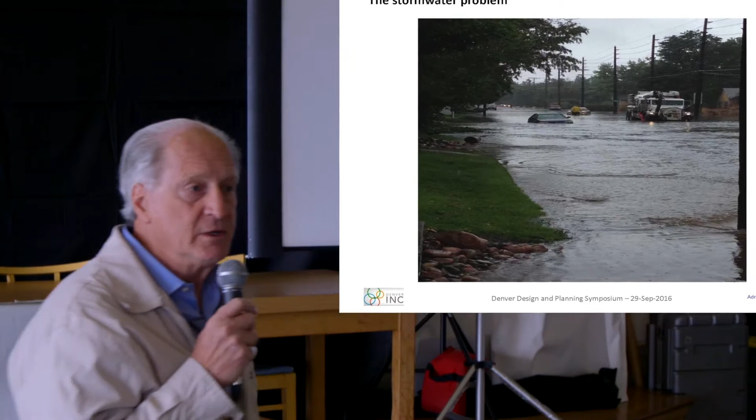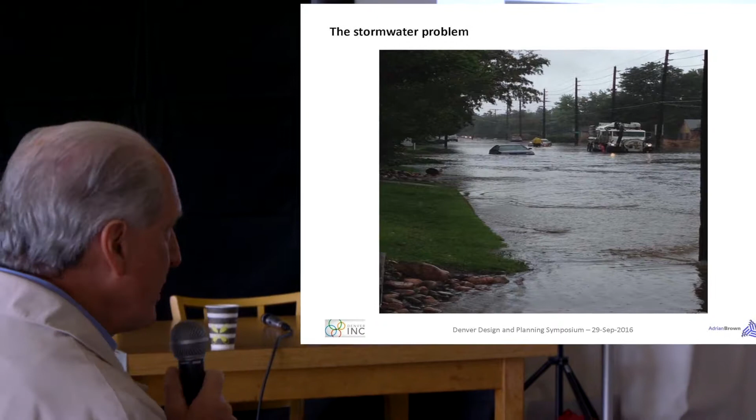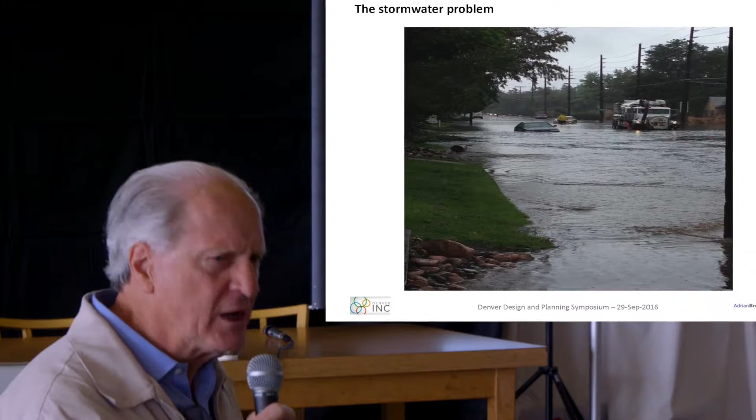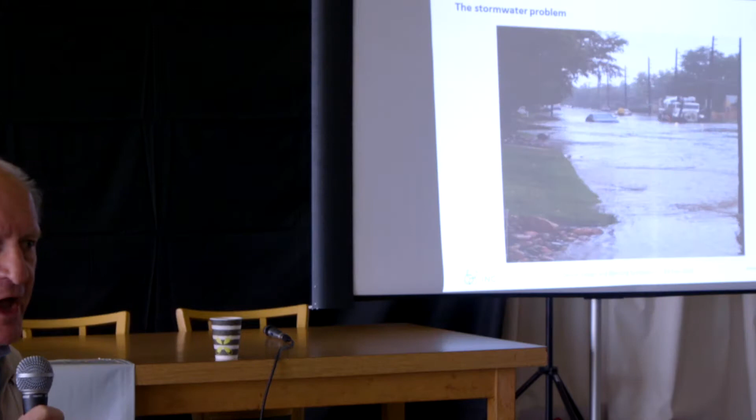I've become embroiled in the last year and a half, 2 years, looking at stormwater, brought about by Denver's insistence on spending $300 million of your tax money, or actually fee money, to revamp a part of our stormwater system. It got me to wondering what we are doing with stormwater protection and why. What we are doing in the first place is trying to prevent floods occurring in Denver as frequently as once a year - this is one about 3 years ago - and as infrequently as once a century. And what we are doing to achieve this is treating stormwater that comes out of the sky as a waste product, and we are attempting to get rid of it as quickly as we possibly can, so that we can go out and get another latte instead of waiting the half hour, the 2 hours, the 3 hours, or even a whole day once a century to get that latte. And we're paying a bunch of money to do it.

Even more ridiculous to me, as a water engineer over all of my life, is that we are in a semi-desert. Here the good Lord sends us a huge dollop of water, and all we can do is say, God, how do we get rid of this quickly? And where do we go to pay a bunch of money to put it together quickly? In my mind, that is absolutely asinine planning. I'm looking at the end of this discussion to have every person in this room get active in stopping this insanity, getting the simple solutions that I'm going to present to you, which every person in this room, with the possible exception of me because I've got 2 artificial hips, can implement themselves. On with my story.

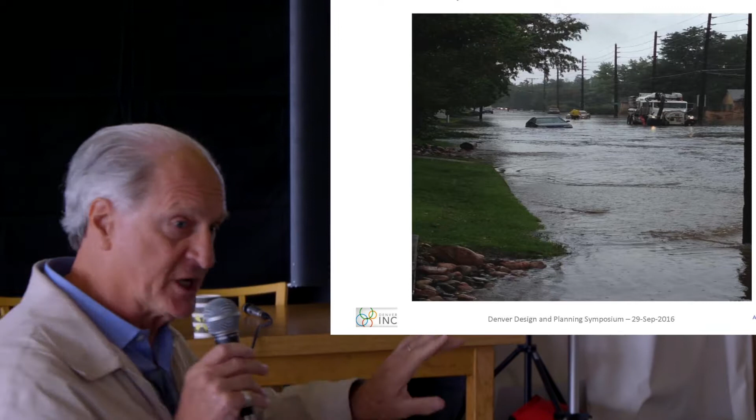You'll notice on this picture, important to my presentation, what has flooded? The road. What gets people really mad in Denver when something floods? Their basement? No, you hardly hear anything about that. It's when they can't get in their car to go get that latte that they get angry. That's what we're spending $300 million fixing. We need to stop this. Over here is a vac truck, out there trying to unplug the drains, which have plugged up, and which this poor guy doesn't seem to be able to realise are there. The bottom line is this picture, famously put in the newspapers and shown as utterly unacceptable, shows the true insanity of all of this.

Getting rid of this floodwater when it occurs is a major engineering challenge - nobody be unclear about that. Under the whole of Denver, there are all kinds of water management systems designed to deal, up till recently, with a 1 in 5 year storm, and now, in parts of Denver, a 1 in 100 year storm. These are massive engineering undertakings, very expensive and difficult to keep running.

So what happens? Well, let me just quickly go back to this. This water here came from someplace else as a result of a storm. Look what is happening locally as a result of that same storm, which it presumably got. Looks pretty damp to me - nothing, it's not flooded here. This guy could go out and play golf, chip balls around and so forth, in the rain doing this. This is something that somebody else gave him - somebody else being mostly the people who live higher in the basin, which in Denver typically means the nicer areas. So by allowing stormwater, we create a social problem.

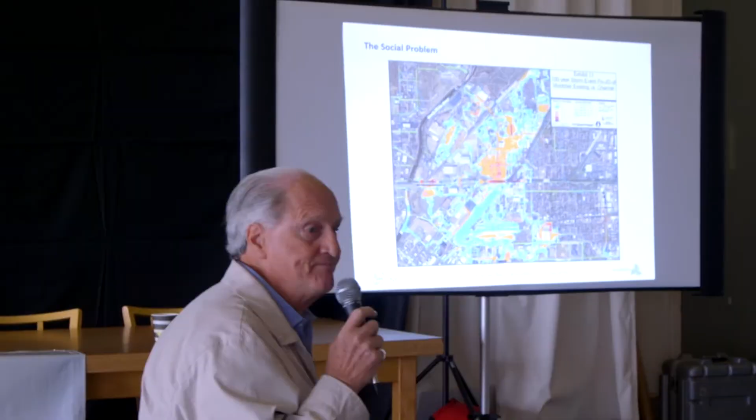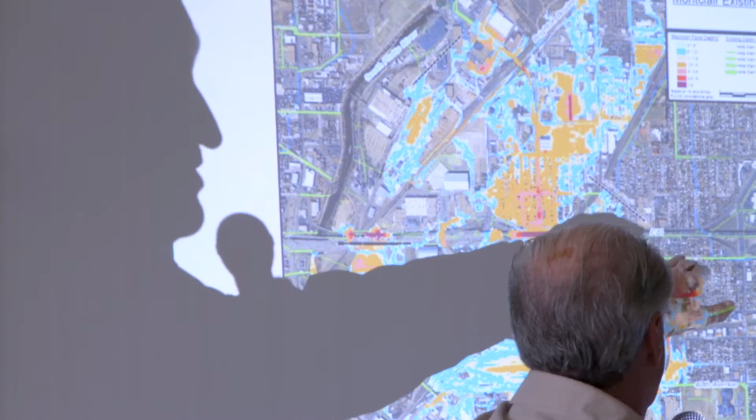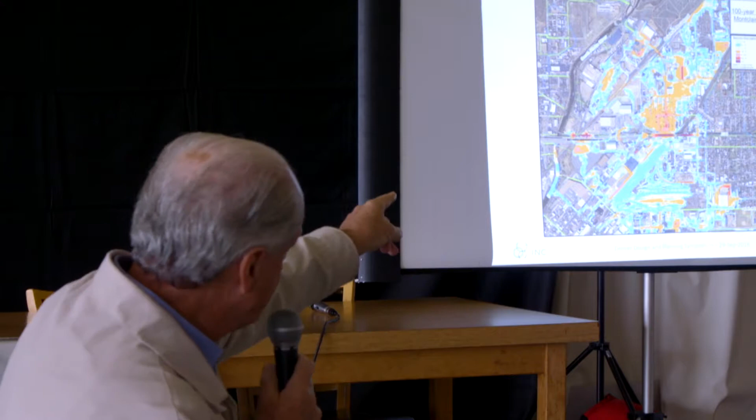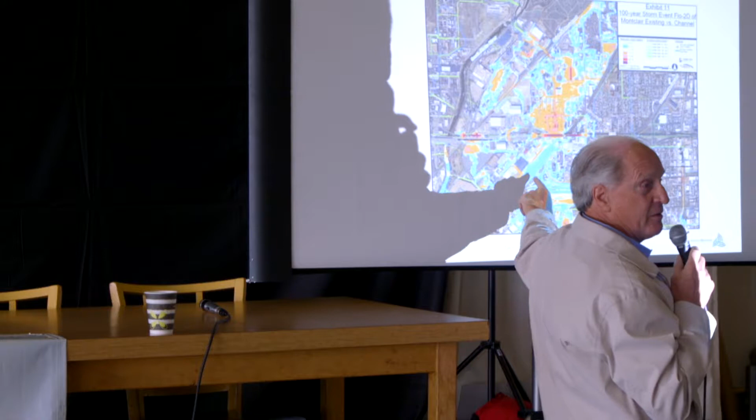This is a picture from a storm event, a modelled storm event, of the low-lying areas of Denver. Down here is I-70, here's Globeville, here's Elyria Swansea - the industrial and relatively affordable housing areas of Denver are all down there. But we don't care too much about them. Even the $300 million program we're instituting right now won't protect these people. It doesn't affect anything about Globeville at all, except possibly that it puts a bunch of water into the Platte River, thereby exacerbating any flooding on the other side of the river in Globeville. The reason for that is fairly complicated - I'm not going to go into it, but trust me, it's true.

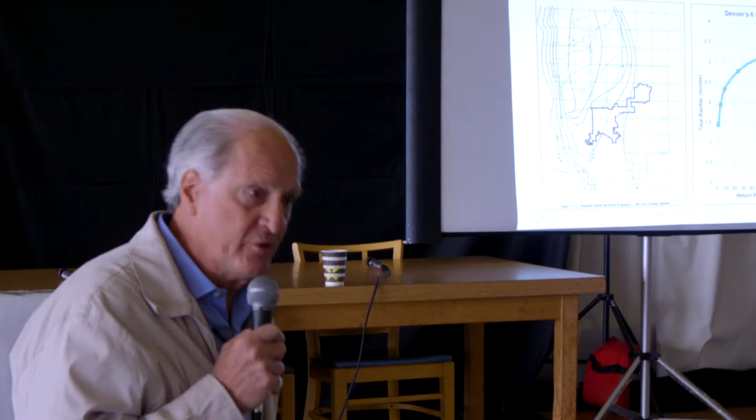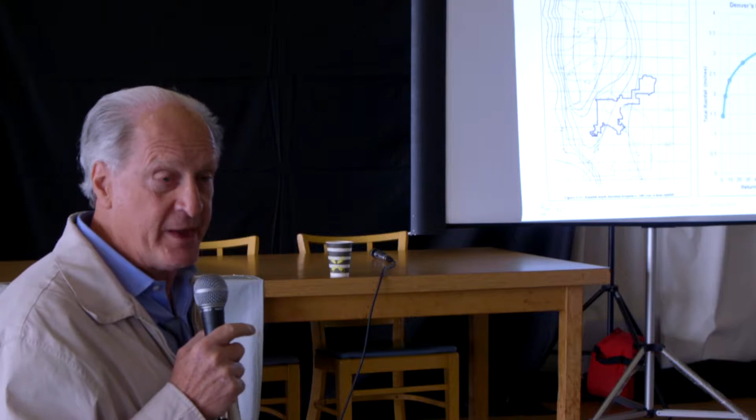So what are we talking about here? You've heard, no doubt, about the recent flooding in Houston and on the East Coast. They were getting in the order of 15 to 30 inches of rain, this deep, coming out of the sky on every square foot of the whole area. And when that happens, you've got a problem, and a really serious problem.

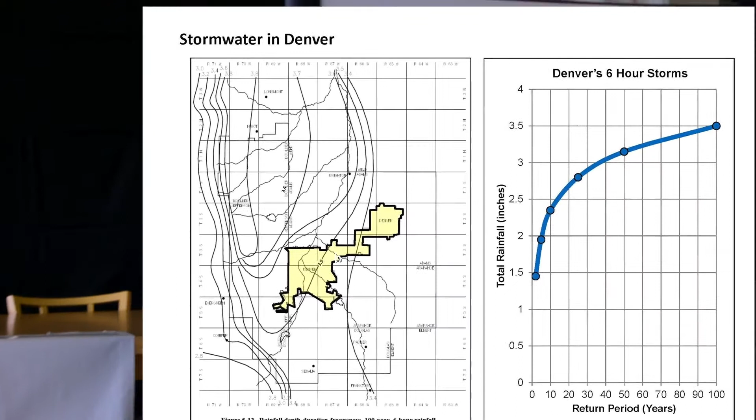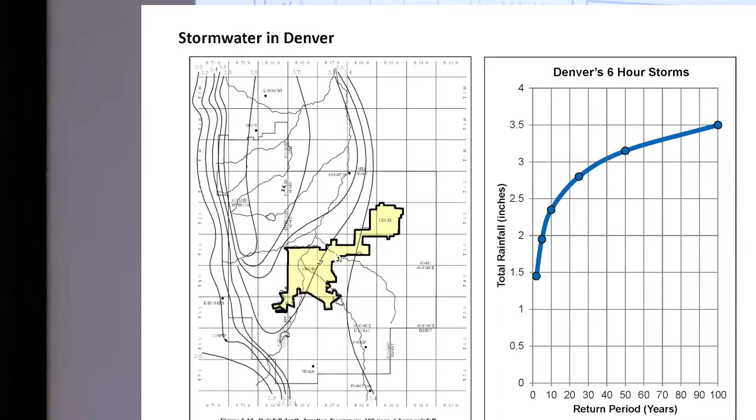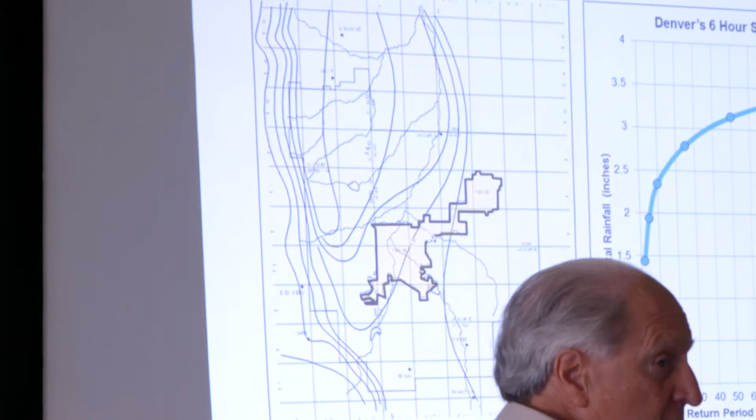We don't. This is the design document that Denver uses for its stormwater that shows the rainfall depth for a 100-year, 6-hour storm. They use other things, but I'm just going to deal with this one because it's illustrative. If you look at this, this is for 6 hours. Right through here is the 3.5-inch rainfall. So a 100-year storm in Denver gives you this much water.

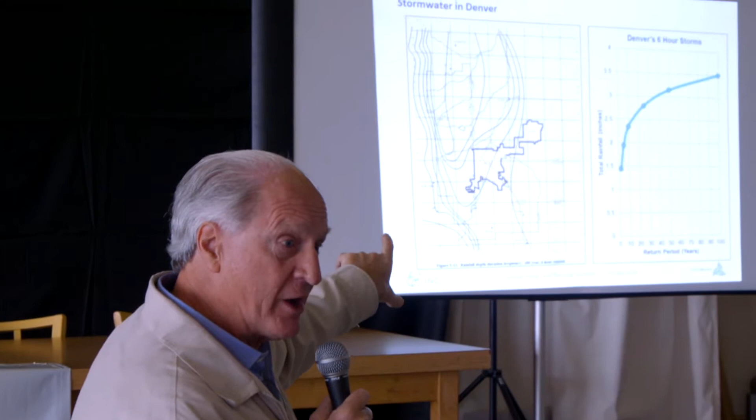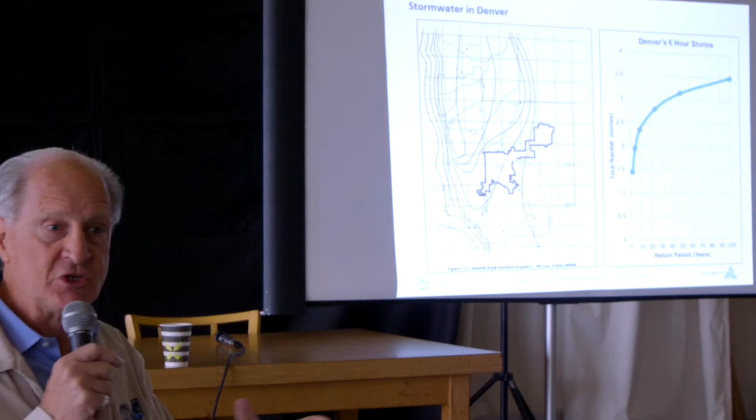That's why, when it happens, that guy can go out into his front yard and chip balls around, because it ain't there very long, and it isn't very deep even when it is. Take that water, however, aggregate it over 200,000 houses in Denver, and let it go down the road, and guess what? You're confronting what the guy in the floating car was confronting, a massive downstream problem.

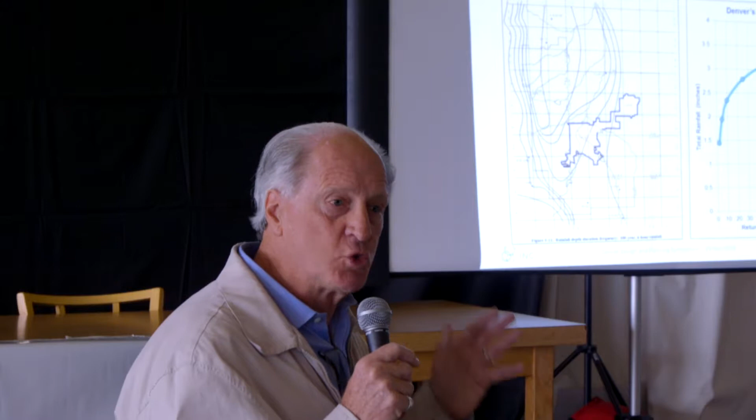So, as with most problems, the solution to this problem that's sensible is a source solution. The problems we have right now are from the aggregation of all of the runoff going down into a very limited set of conduits. Where does it come from?

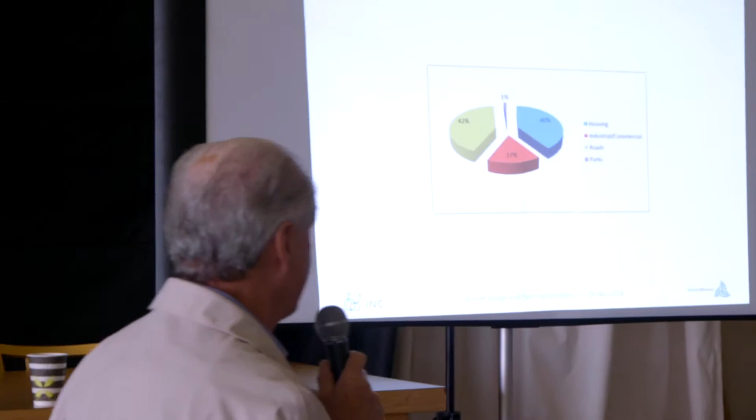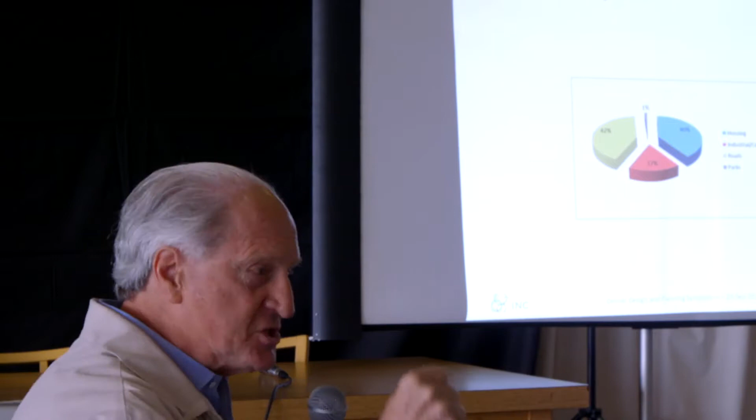Well, this is a little pie chart. Stormwater flooding sources. To, I think, everybody's great surprise, 40% of the water that winds up running off, more or less instantaneously from our urban environment, comes from housing. And what do we do with that as homeowners? We have downspouts, and we, by God, like the city, rush to get that water off of our property, because it's a waste, and into the street.

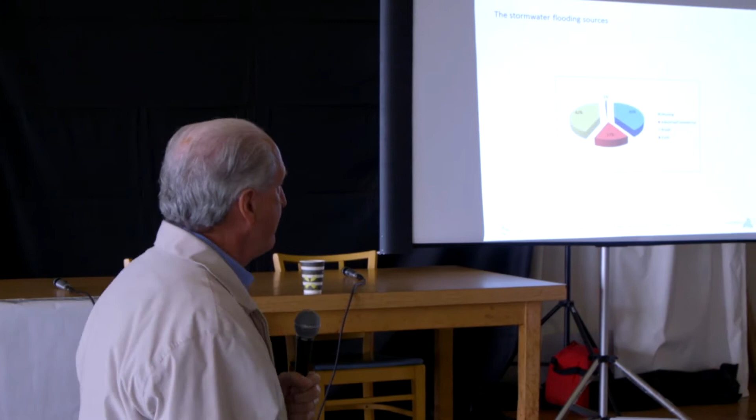Everybody does that, pretty much, except me. The next big hit is from roads. Big surprise for people. A lot of people think, oh, the big problems with flooding and stormwater are industrial. Well, they're not. Well, they're significant, but they're not huge. 17%. So we're 40%, industry 17%, and roads that we insist on driving these gas-guzzling cars around on are actually the biggest villain of runoff.

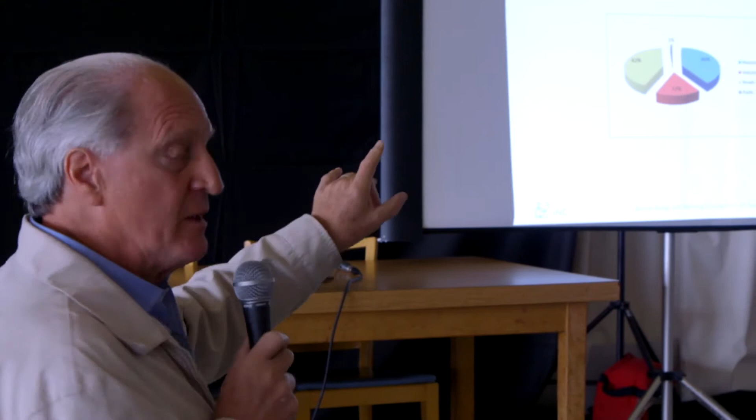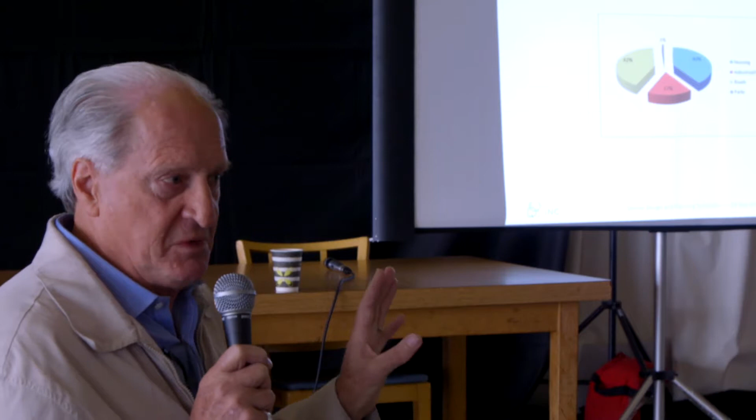So we need to address all of those things. The 17% from industry kind of has been addressed a bit with the Green Roof initiative, which our city not only declined to support, but actively opposed. But the citizens very smartly decided that it was probably a good idea, possibly because they thought that industry would pay for it. But, you know, for whatever reason, it was successful. And it has been successful, and it does create a significant stormwater benefit, among other benefits.

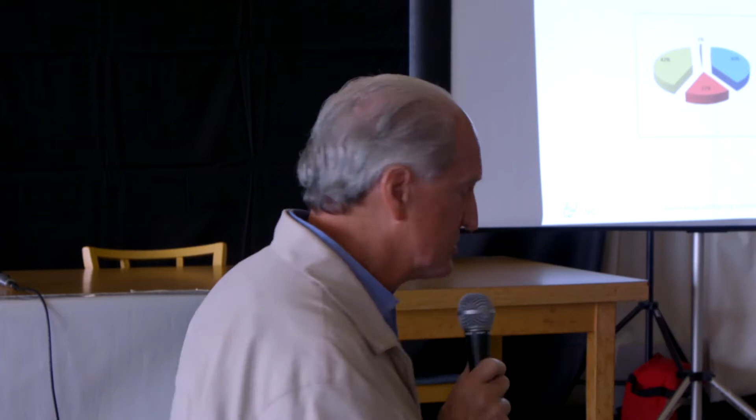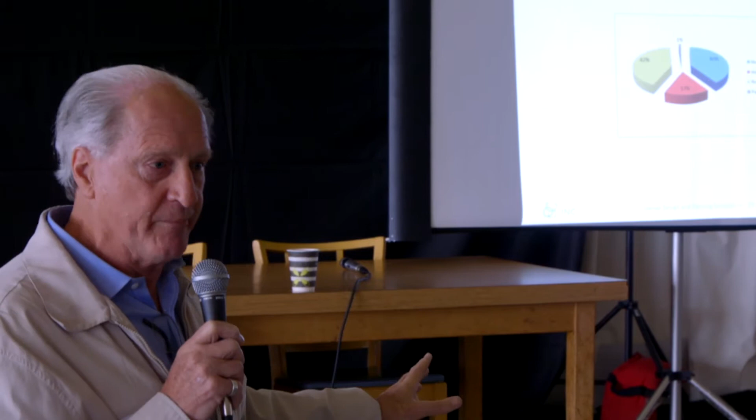So, you know, I just put in here because I know the parks people are here. Parks are 1%. The reason that's important is that is the area that we are currently using to solve our stormwater problem. So we've got 1% of the stormwater coming off the parks and 1% of the area, and we're going to use that 1% of the area to stop people playing golf and start storing our stormwater.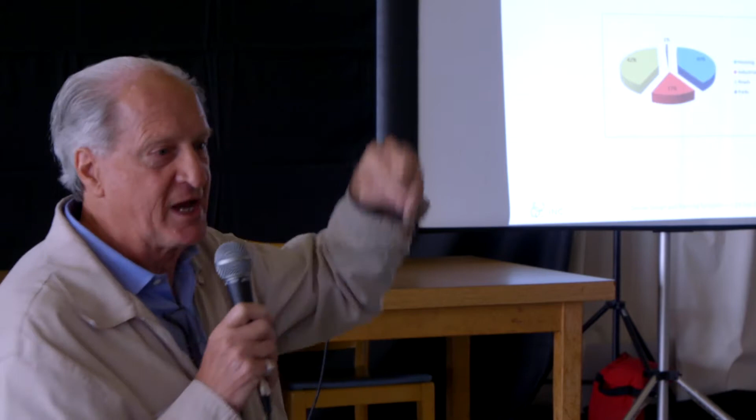I'm not going to be finished in 5, because this is too important, I would believe.

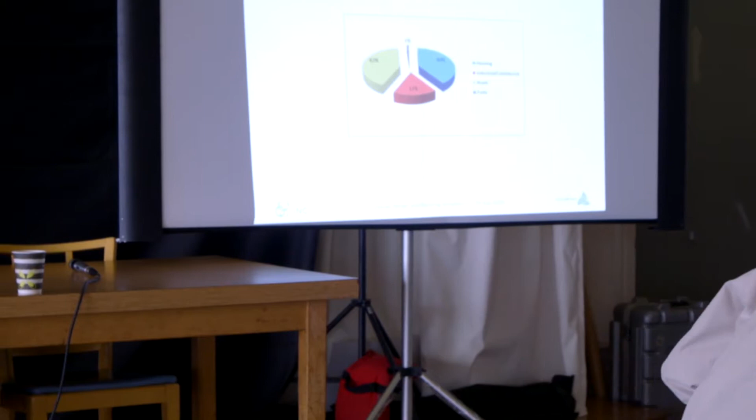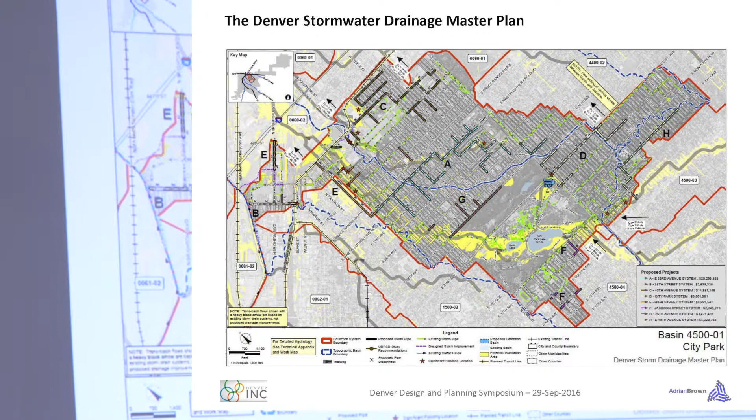So what's our current system? Our current system, this is an example out of the Denver Storm Drainage Master Plan. It's a 40, 50, 60-page thing with huge plates like this showing all of the plumbing we've got to deal with this one problem. And this happens to be the one that's centered around the golf course that got dug up. I'm not going to go into that more than to say it's complicated, it's meant to be complicated, it's bloody hard to do.

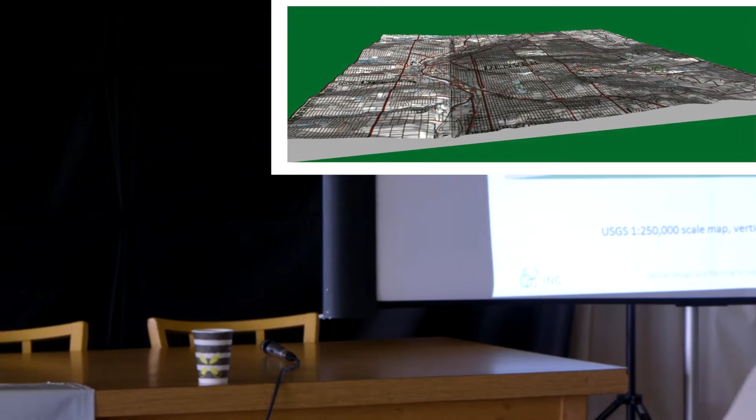But what are our opportunities here? And they can be encapsulated by looking around. Unless you look in this direction, Denver's pretty flat, the Queen City of the Plains. This is an example, and you can see just how flat. This is a 10-to-1 vertical exaggeration. Look at the edge here. Bit of a slope on the west side, we're over here someplace. Even less of a slope over there. It's flat, folks. And from a stormwater point of view, that's both a good thing and a bad thing.

It's a bad thing because when rain lands, if you want to get rid of it, you've got very shallow gradients. So the pipes don't work very well. And you don't get much runoff. So what happens? You get buildup of water. People don't like that. The good thing, however, is that if you don't want to get rid of the water, but want to keep it someplace, it's flat. So it just tends to stay there. And if you put little dams in, you can help it do that.

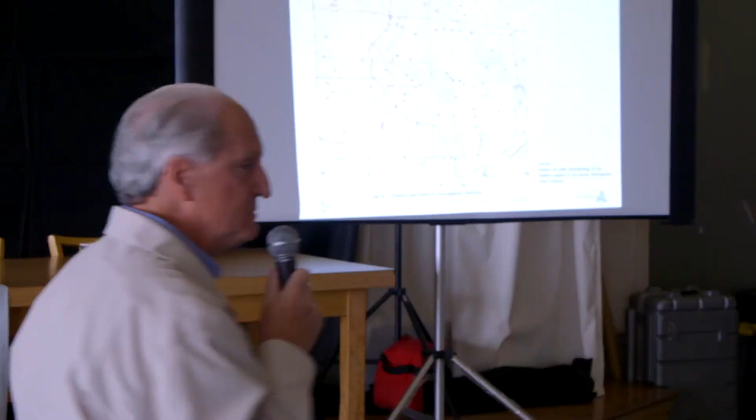Second important thing, Denver's permeable, but basically covered with sand. Not everywhere, but it's permeable, so that any water that lands, you don't even have to store it for that long to get rid of the 1 hour, 2 hour peak in the storm thing.

You can let it sink in, and that has other benefits I'll get to later. Third benefit, the water table is quite deep around Denver. The water level underneath most of Denver is at least 20 feet below ground surface. Why? Because we paved over Denver. It used to be at the ground surface, but it's not anymore. We paved it over, prevented infiltration. Next thing you know, the water table drops. This groundwater is being used by Adams County, South Adams County, as its only water source, and so they're drawing this water down as well because they need to, and they have a right to.

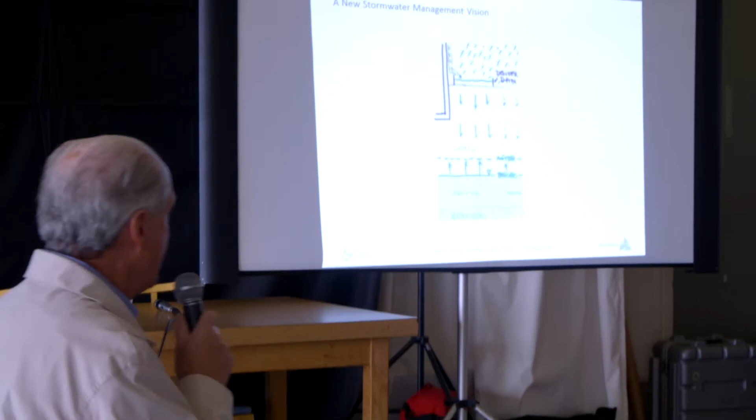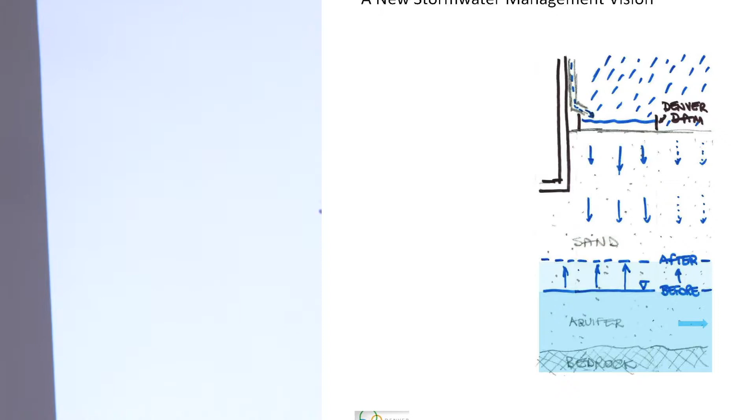So what's my new vision? I make no apology for the quality of the graphics here. My son didn't draw them, I did. But some of you have seen these before. Here's the new vision: capture the stuff off your roof, direct the flow, put in little Denver dams if you need to, or put a little berm around your garden and keep it in. How long do you have to do that for?

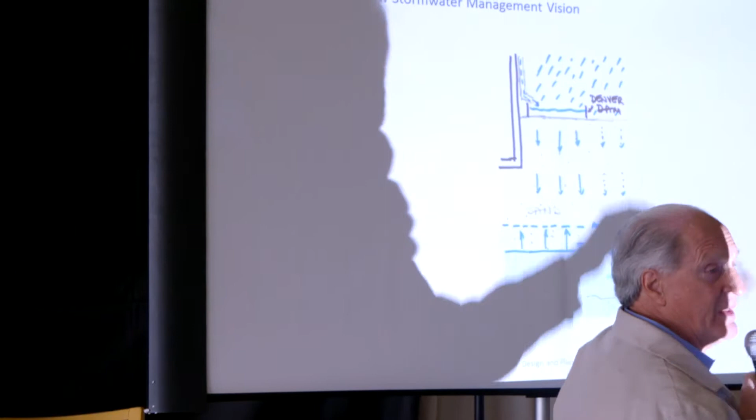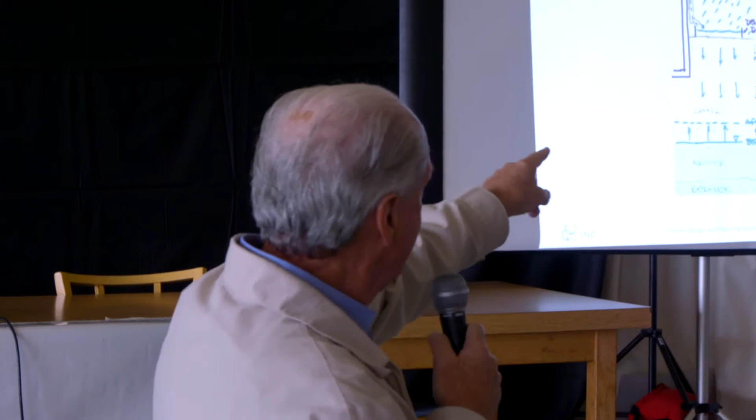An hour's good, 3 hours is very good, 6 hours is overkill. Because it's a short-term event, folks. You keep it in there, it's not going down the road, you're good. And everybody can do this, and can do it very cheaply.

What happens? Well, after a while, this stuff just gets, actually the physics are, it gets sucked into this unsaturated zone. This is the 25 feet of dry sand underneath your house. And then it goes down into the aquifer and sits there. And then very gradually, because it's so flat, the aquifer as well as the ground drains quietly towards the South Platte, and it'll get there in 10 or 15 or 20 or 100 years, but a long, long time, those molecules. So this is my strategy.

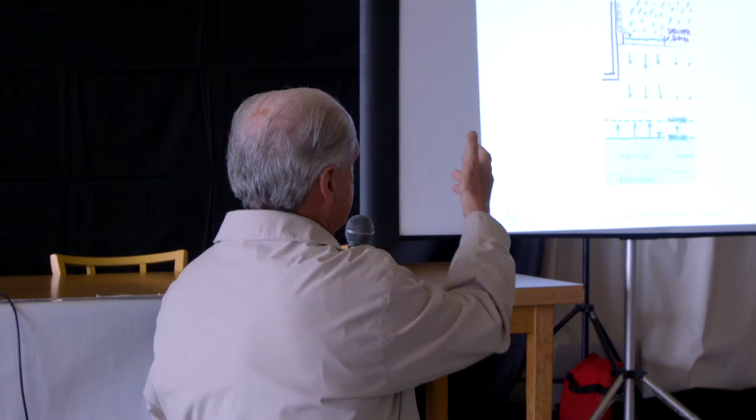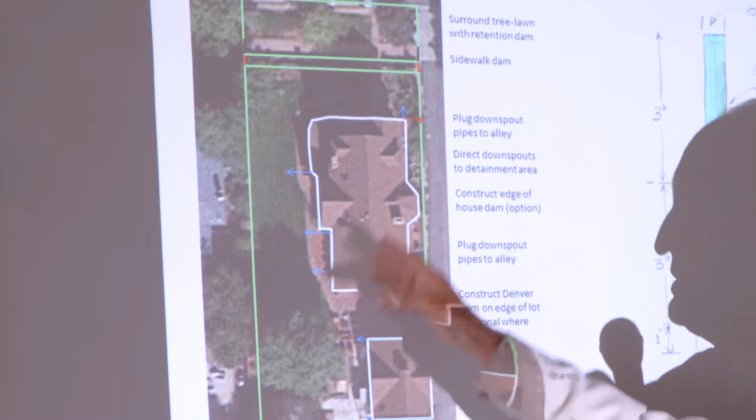Okay, how can it be done? Very easily. This is it applied to my house. You go in, you put a little Denver dam around. Well, first you direct all of the water, where to stand. Direct all of the water off of the roofs of the various places into your garden, not into the street. Point one, which is you can buy that stuff at Home Depot, real cheap.

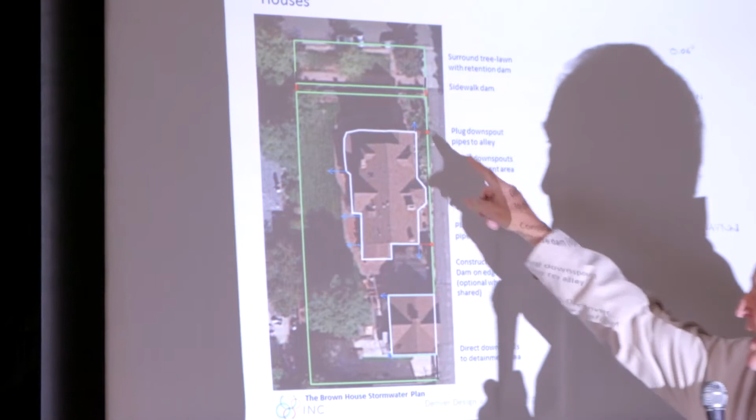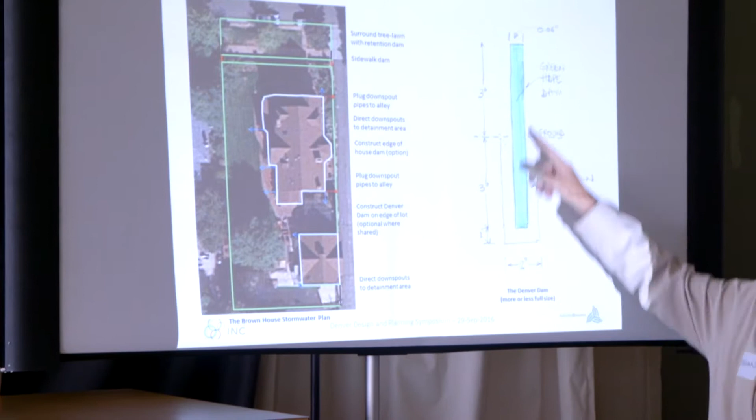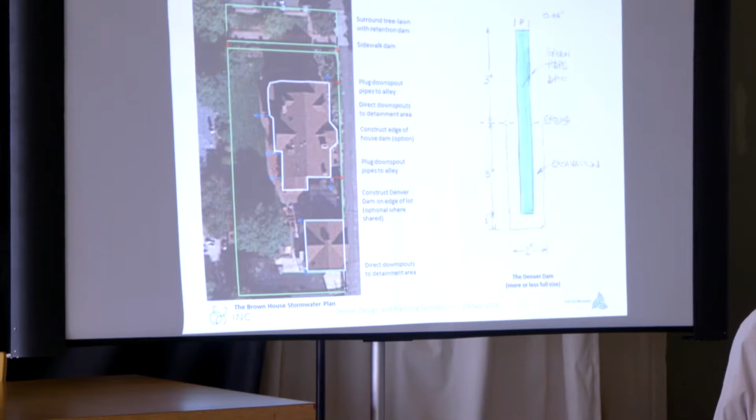Secondly, you then put in a dam around some, hopefully all, of your garden to stop the water from draining into your neighbours or, more importantly, into the street. And how do you do that? Here's the engineering, folks. This is about real scale on this. This is a 6-inch strip of plastic in a 3-inch hole. And that's it. And the water backs up behind this. Does it leak? Yeah, a wee bit, but not quickly enough to defeat its purpose, which is, again, 1, 2, 3 hours max.

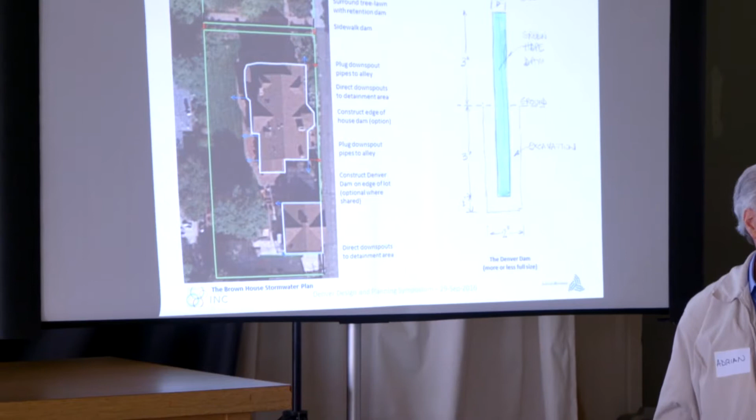And you can build it — if the Rolls-Royce version is to fill this with granular concrete. Why? Because then the plants don't grow on either side and be difficult to mow. Or you can just pack it with dirt, anything. And I think everybody in this room can do that themselves. And for my property, the total price of doing this, both of those things, is less than $1,000.

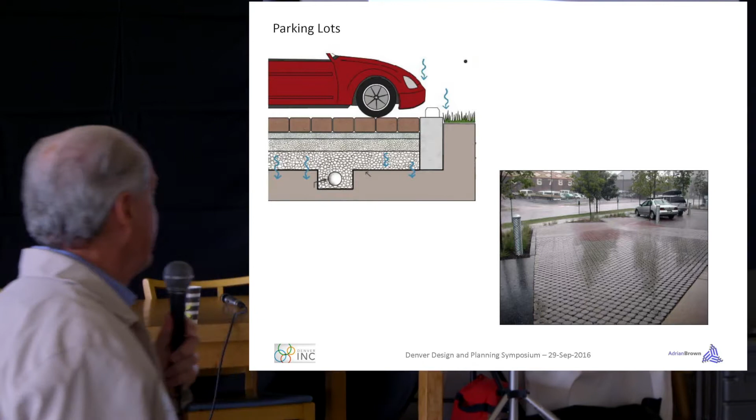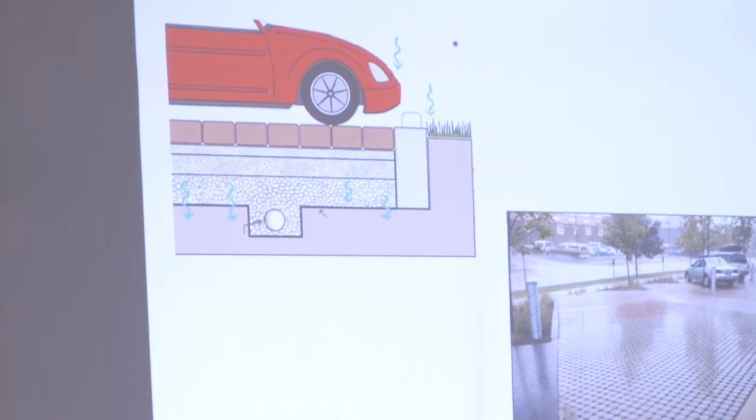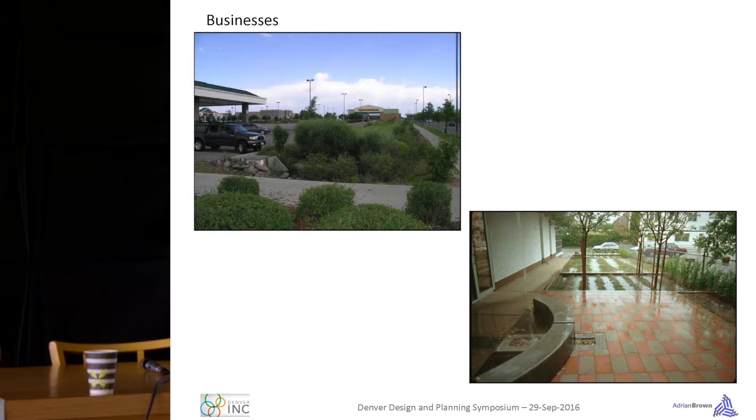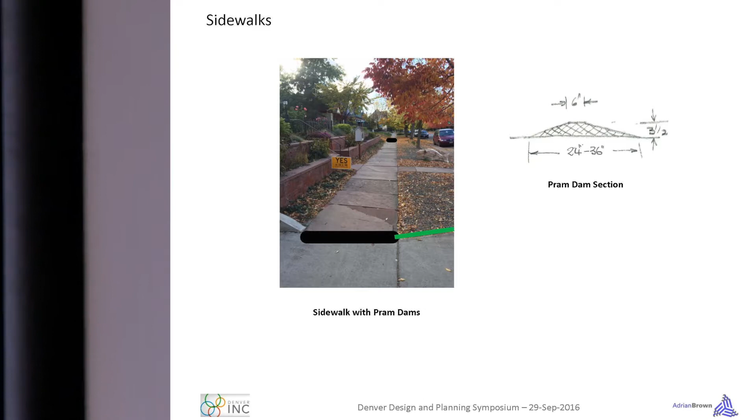If you're going to encourage storage and infiltration, parking lots, obvious: put in pervious type stuff so that the water can sink in instead of blacktop, and try and prevent water from going off of it. Businesses, in addition to the green roofs, same deal. Just trap the water, let it sink in, and make things pervious. Alleys, same deal. Great storage opportunity. They're mostly flat. Put a little bump at either end. And the city can do that when they're redoing the pavements, once every 10 years or whatever.

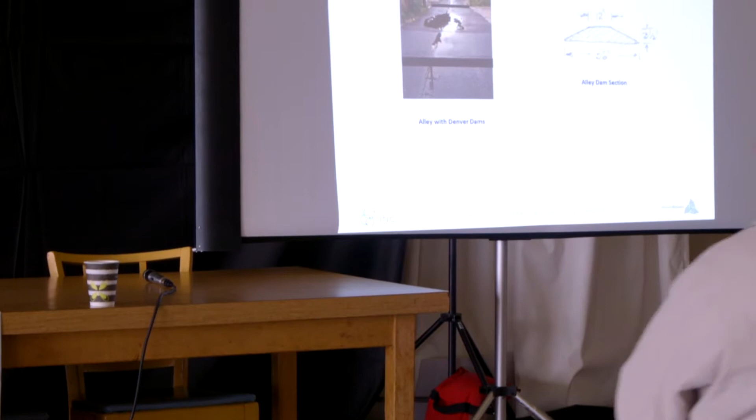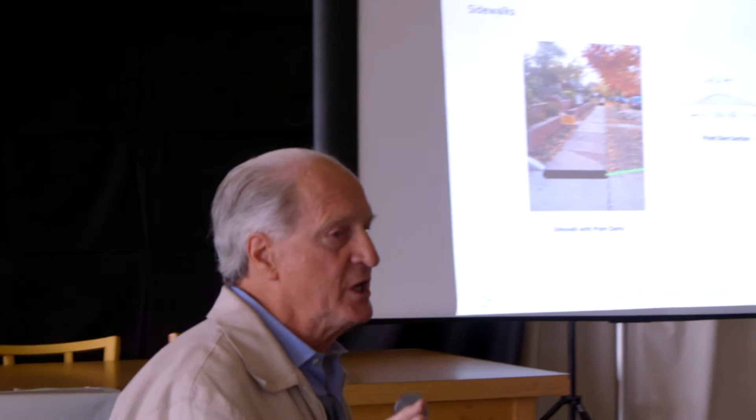So there's zero incremental cost to doing this, despite what the city's engineer told me. And you can make these little dam sections flat enough that they're ADA compatible, and my kids can ride over them on their bikes. And if I inject a little humour into this, folks, trust me, I am absolutely serious about this. You will have seen on the front page, my engineer stamp is signed. These are engineering drawings, and I am deadly serious. There is nothing funny about this. This is catastrophically bad city planning at its worst, and most destructive for the environment and for our community.

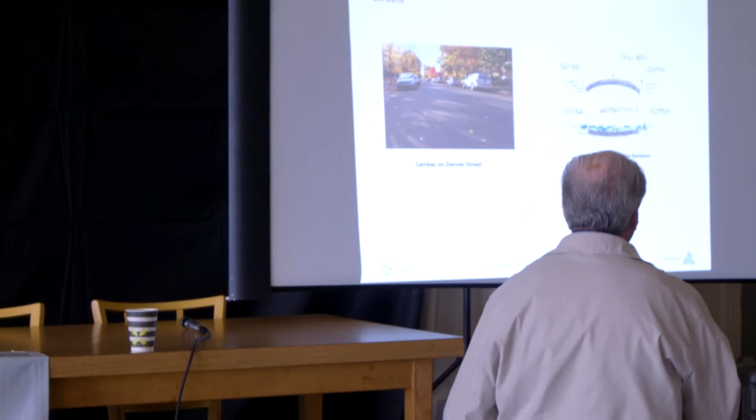Roads. We currently camber our roads, all of them, like this. Why do we do that? The main reason is so that we can go as fast as possible along those roads while it is raining without hydroplaning. This camber sheds the road, sheds the water. This photograph is in front of my house, and this enables all of my neighbours to whip down my road, killing my kids, and saving themselves 5 seconds of time. So when they next redo my road, I want them to turn it into something that's flat.

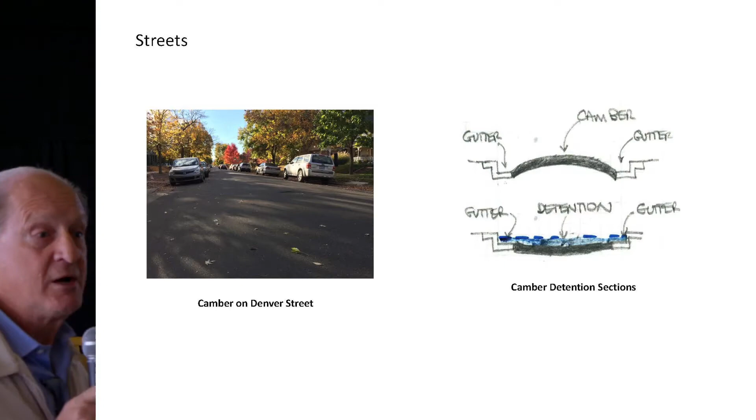Why? Because then we can get 3 inches of detention without even having any drainage. Keep it there for an hour, 2 hours, 3 hours, problem goes away. Remember, that was 40%, 42% of our total problem. Solve it every time we go fix the roads. Send a letter to your senator — no, council person.

How do we make all this happen? It's easy. I tried to download a copy of my bill while I was sitting in the back there, and I couldn't. Denver charges you for stormwater based on the area of your property which is impermeable. They have a rate which goes up the higher the amount of impermeable land you have, and they also charge you per square foot of impermeable land, so you get a double whammy. That price is going to triple in the next couple of years due to paying for our $300 million stormwater system.

So what we've got is a way for us to incentivize doing it at home: source control. Let's make sure that if you can certify that you are containing all of your water on your property, the city will give you no stormwater charge. You don't deserve one because you didn't create the problem. Stroke of the pen stuff. Write your city council person, make it happen, and it will, and help me make it happen.

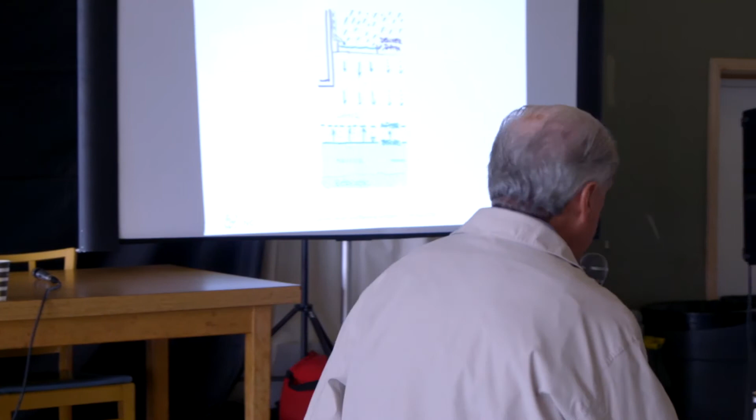I've just got two more slides and then we can go to questions. I want to get to a sustainability piece. I think most of you in the audience will have kind of figured this out, but I just want to highlight it. Remember, we had this system going on, water's going in, we're saving it now instead of getting rid of it. We got a gigantic reservoir, as I mentioned earlier, to save it in.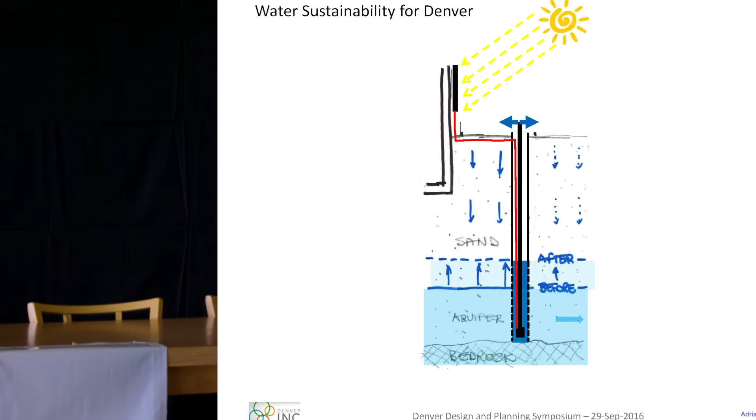I think to further incentivize this, we ought to allow anyone who does this to pull the water back for their own use with a simple little well. This is my lifeblood, I do this all the time. This well is solar powered, it's got a little motor, it's about 25 feet deep. You can literally drill it with a hand auger. You can purchase a lovely little 12-volt pump, or put a windmill up, but windmills don't work very well in Denver unless they're huge.

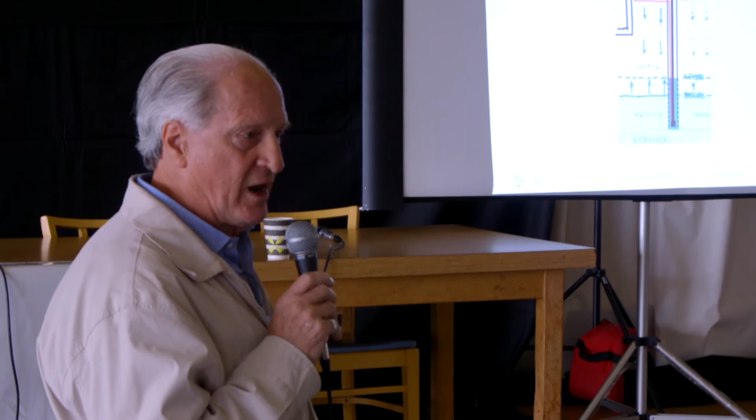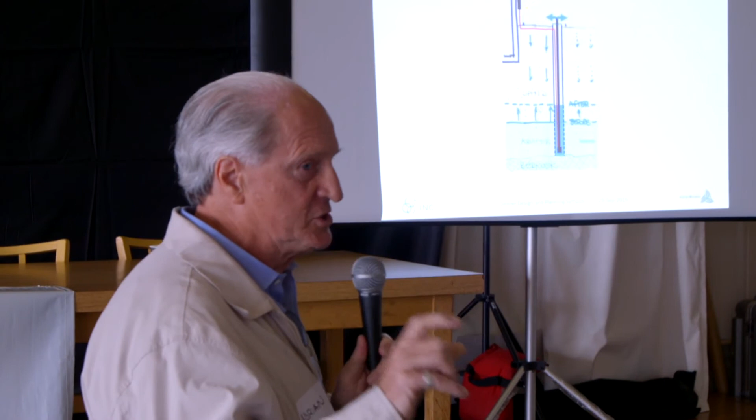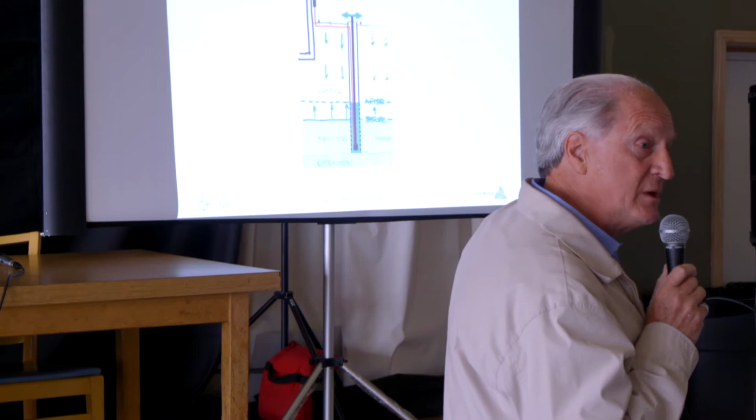But a little solar pump, a little positive displacement pump, one gallon a minute, is all you need. Most houses tend to use between a quarter of a gallon a minute and a third of a gallon a minute for their water needs total, so that's all we need. We can do this. There will probably need to be some slight changes in the water law to get this done, but they are not significant, and I think you can make a decent argument that you are allowed to have a single personal domestic well, even in the closed groundwater basin which Colorado is.

There were three reasons. The first reason was that to do this would, and I am quoting the city engineer here, the now former city engineer, be like, quote, herding cats, and so it couldn't be done. The second complaint was that there was no published peer-reviewed PhD on whether infiltration actually occurs in Denver. There was a third reason, and I can't remember what it was, but the bottom line is I don't think they were that convincing, and I don't think, from what I'm hearing in the press, that I would get the same answer today. I plan to go back and ask that question, because I'm hearing about the city really wanting to be much more green sensitive after the green roof thing particularly, and I don't know whether that's true, but I plan to find out.